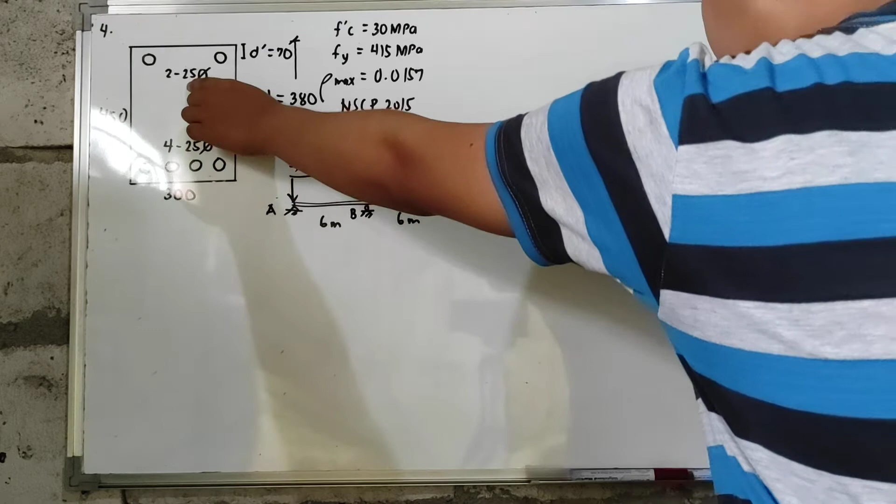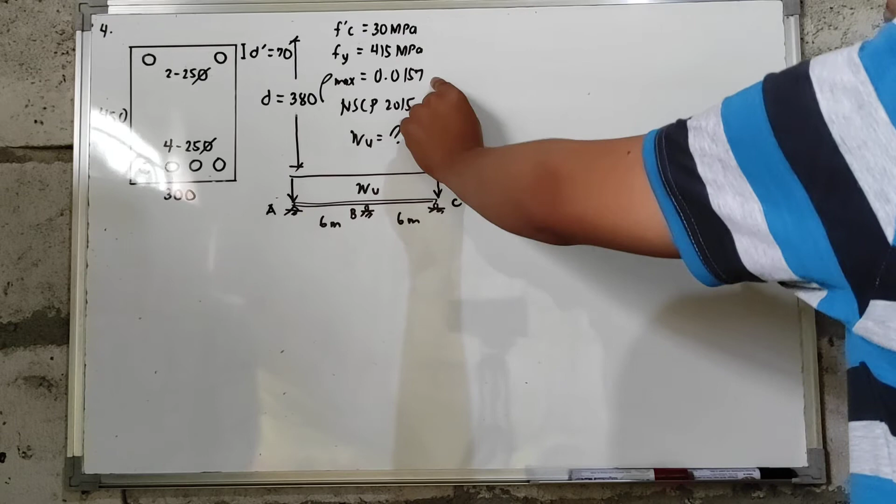The beam is reinforced with 25 mm diameter bars, 4 bars at the tension side, and 2 bars at the compression side. Concrete strength is equal to 30 megapascal. The steel yield strength is equal to 415 megapascal. And we have a given of rho max which is equal to 0.0157.

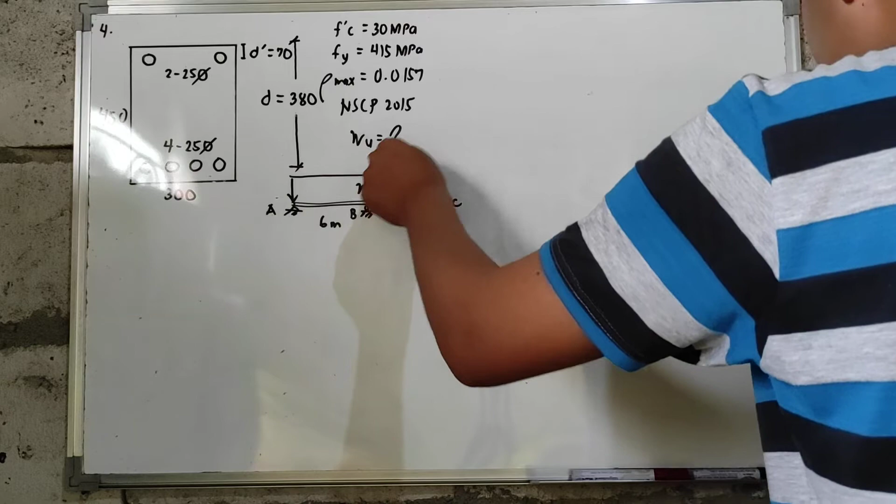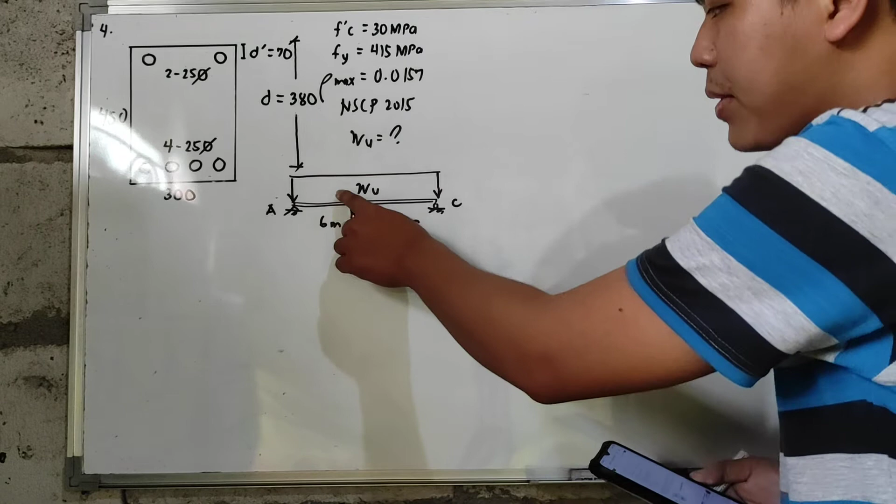We are tasked to determine the value of the factored uniform load that the beam could carry using NSCP 2015 provision. So meaning to say factored load, that's why we have subscript U. Meaning to say, the value of W we're looking for is already ultimate.

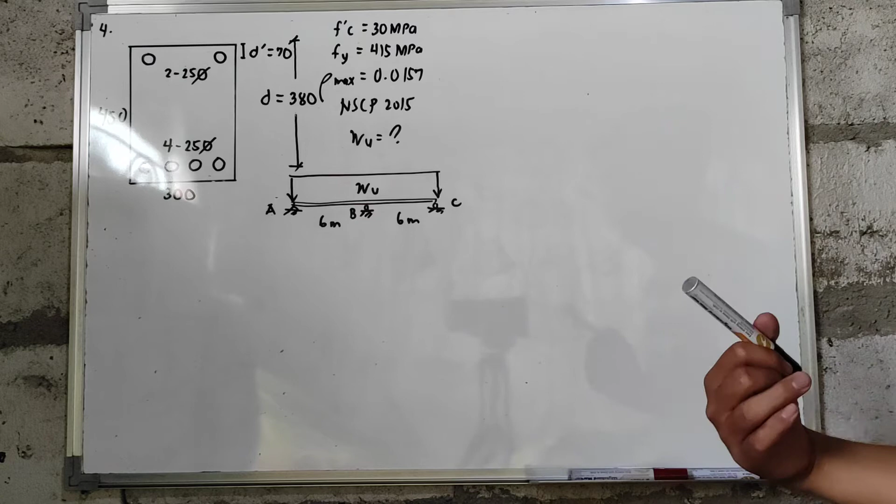So to find the value of our W, we need to know our maximum moment. So our maximum moment here, we equate it to the ultimate design moment capacity of our beam. So how will we know the value of our MU? By means of finding the design strength using our formulas for DRB.

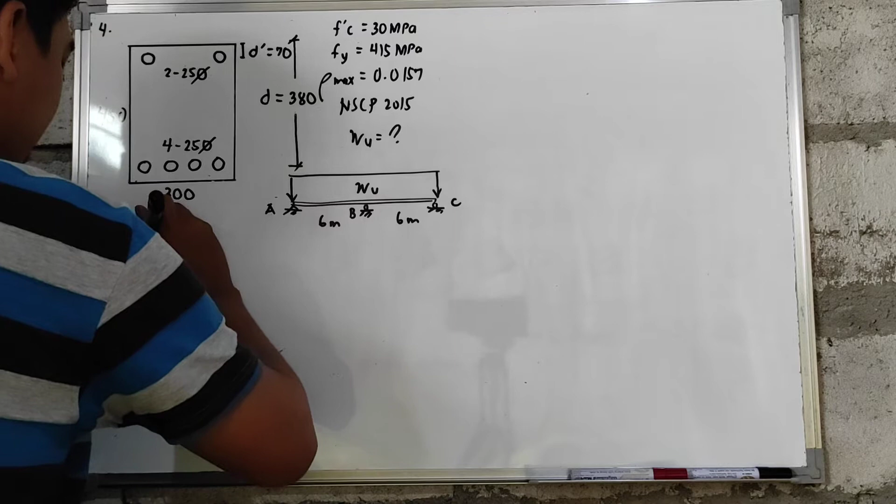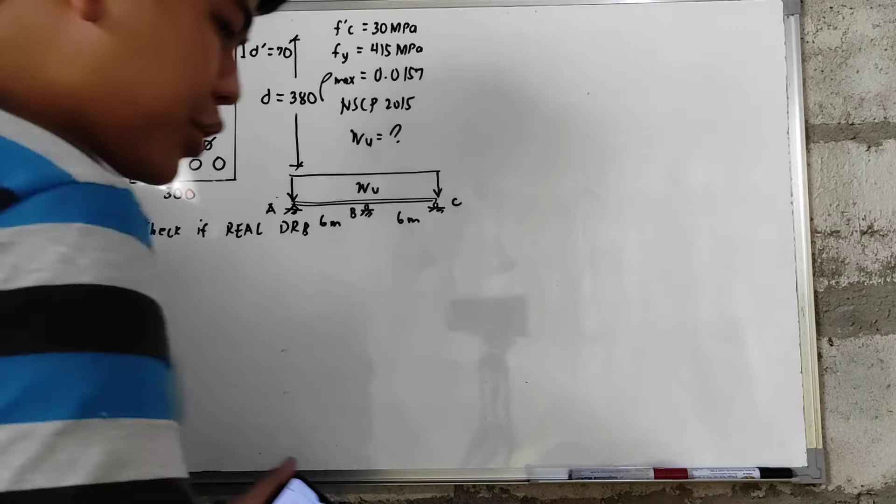Before we proceed to getting that maximum moment, let us first check if this is really a DRB (doubly reinforced beam). Sir, how do we check if this is DRB or not? So let us first find our actual rho and we're going to compare that to the value of rho max.

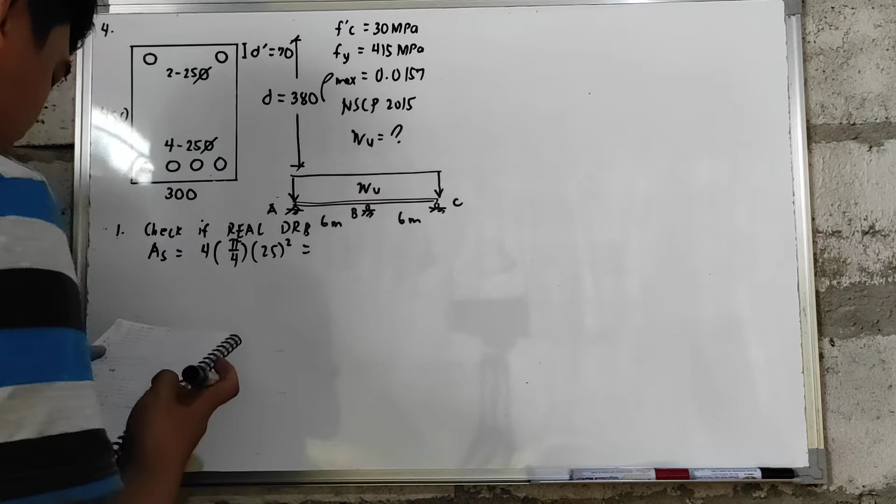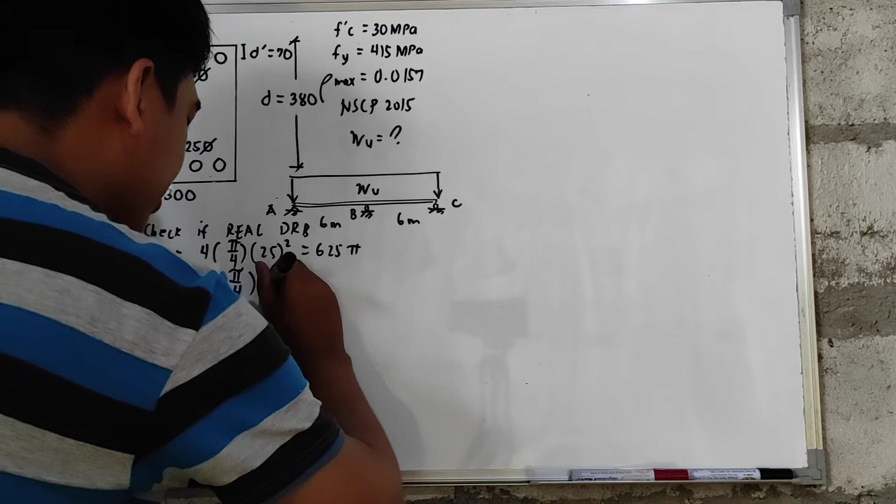So let's get our As first. We have 4 pieces of 25 mm diameter bars, so we have 625 pi. For the area of steel on the compression side, we have 2 pieces of steel bars with a diameter of 25 mm, so we have a value of 312.5 pi.

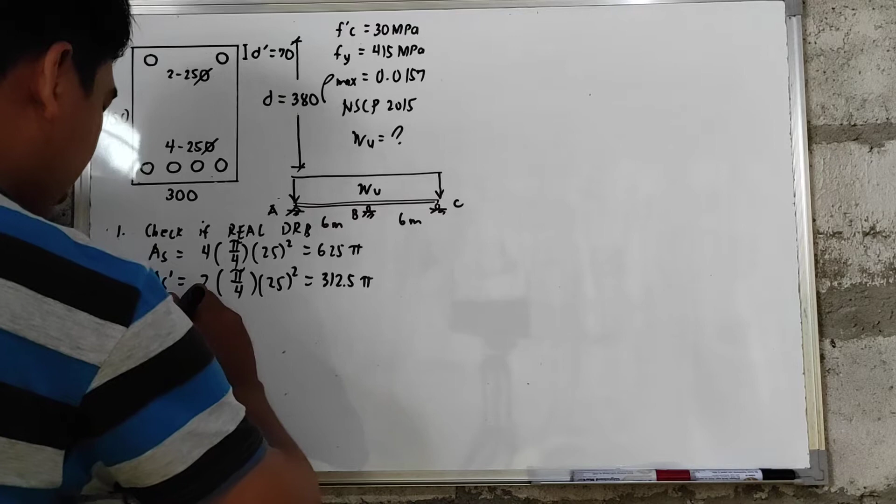So in checking for DRB, let's first get the actual rho. That is As over bd. So our As, that is 625 pi over our b, that is 300. We have an effective depth of 380. So we have a value of rho equal to 0.01722. So comparing it to the given rho max, this is greater than the value of rho max.

Therefore, we have a doubly reinforced beam. So for the next procedure, we will...

assume that using C equals T, we're going to assume that compression steel will yield. So when compression steel bars yield, the value of Fs prime is equal to the value of Fy. So C equals T, so we get C sub 1 plus C sub 2 equals T.

So our formulas here, our C sub 1, that is from our singly reinforced beam, is 0.85 F prime C times A times B, plus our C2 due to the compression bars, that is As prime times Fs prime. But since we assumed our steel yielded, that is Fy equals As. So for DRB, automatically we assume the tension steel yields, and later we'll check if the tension steel and compression steel really yield.

So if we substitute our givens, we have F prime C of 30 megapascal. Our A, that's what we're solving for. Our B, that is 300. The value of As prime, that is 312.5 pi multiplied by Fy of 415, equals 625 pi, that is the value of our As multiplied by Fy of 415. So the value of A is now equal to 53.258 mm.

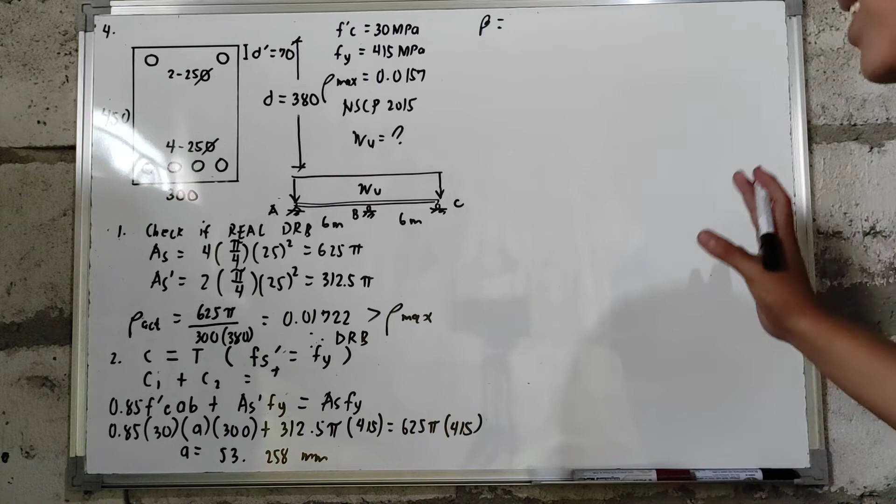So to compute the value of our C, we need the value of beta. Since we're using NSCP 2015, our limiting value for that is 28 megapascal. Since our actual compressive strength is greater than the limiting value, we're going to use this formula: 30, our actual, minus 28, our limiting value, over 7.

So the value of beta is now equal to 0.836. So now we can get the value of our C. All we need to do is divide the value of A by beta. So we will have a value of 63.706.

So for the next step, meron na tayong value ng A at saka C. So we will check if our assumption is correct. Sir, paano po natin i-check yung assumption na yan? We will calculate the value of your Fs and the value of your Fs prime.

So for the Fs, that is 600 D, we have an effective depth of 380 minus yung C natin na 63.706, over yung C natin na 63.706. So we have a value which is equal to 2,978.94 megapascal, which is greater than the value of your Fy na 415 megapascal.

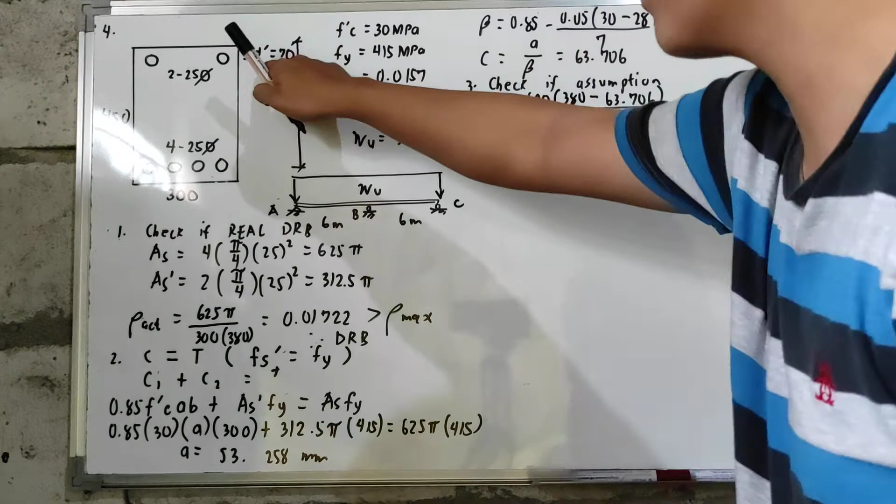Therefore, tension steel still yields. Next, for the Fs prime, we have 600 times C, 63.706 minus yung D prime natin. From the center of your compressive steel bars reinforcement to the outermost fiber of the beam in compression, we have 70 over 63.706. So you have a value of, eto negative yan, di ba? Negative 59.279 megapascal. So negative pa yung value natin.

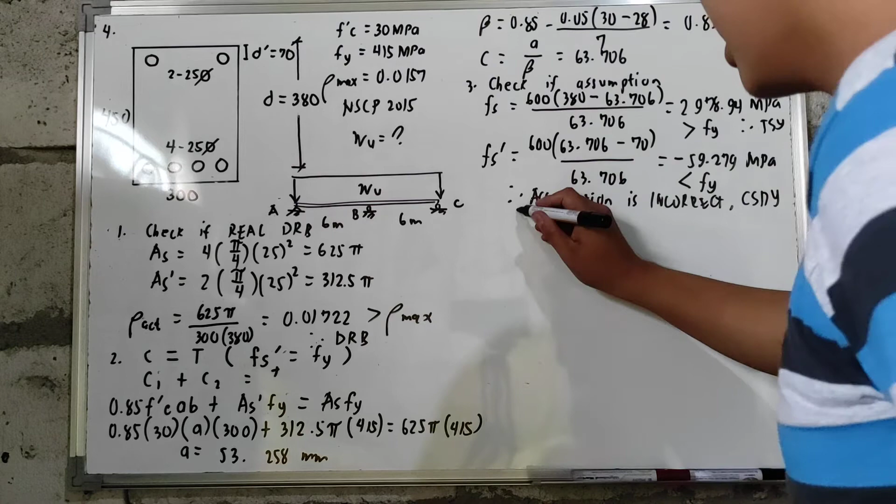Definitely, that is less than the value of your Fy, meaning your assumption is incorrect. Meaning to say, your compression steel bars doesn't yield. So kung mali yung assumption mo, recompute tayo. If you are going to recompute, go back to step number 2.

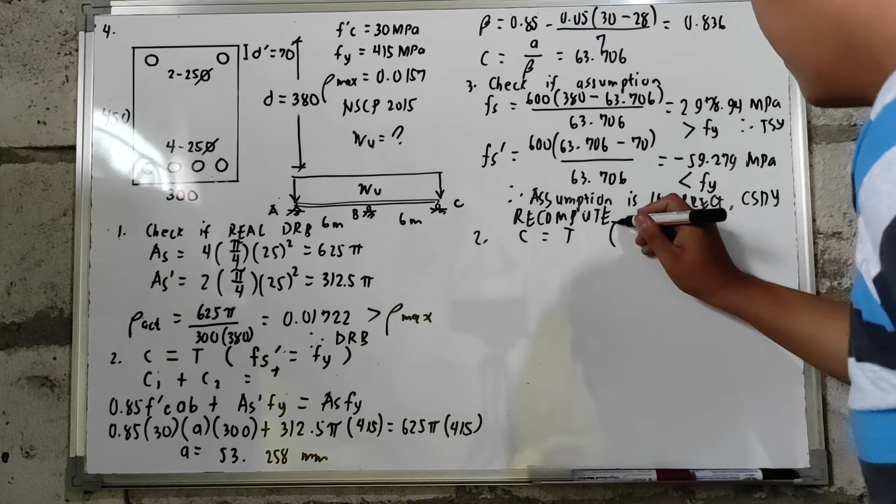So by this time, magiging C is equal to T na tayo. Pero yung value ng Fs prime natin, that is equal to 600 times C minus D prime, over C. Okay? So with that, yung C1 natin, same lang naman yung approach natin dito. Kaso nga lang, yung A natin dito, mangyayari niyan is A is equal to beta times C.

So if we substitute yung mga values natin, you have 0.85, yung F prime C natin, that is 30. Yung A natin, yung beta natin, we have 0.836C multiplied by the value of your B na 300. Plus yung AS prime natin na 312.5 pi multiplied by yung Fs prime natin.

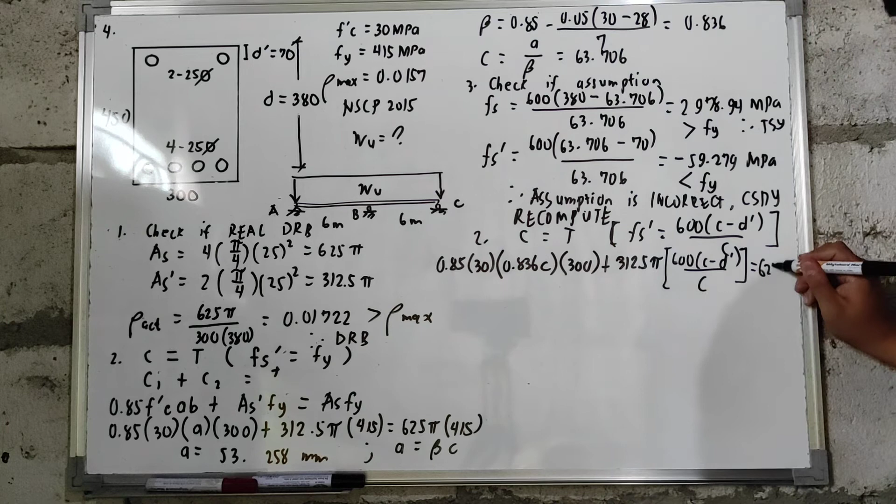So ito yung gagamitin natin na value ng Fs prime. So you have 600C minus D prime over C is equal to AS. Yung AS na na-compute natin, that is 625 pi multiplied by 415, which is the yielding strength ng steel natin. So by shift solve, we can now calculate for the value of your C, which is equal to

99.87 mm. And next, we're going to compute for the height of your compression block, that is beta multiplied by C. So you will have a value of 83.49 mm. And lastly, we're going to check if our assumption is correct.

Paano po natin i-check yan? So kunin natin yung Fs, kunin natin yung Fs prime. So Fs, you have 600D minus yung na-compute natin na C na 99.87, over the value of your C na 99.87. So you have a value of your Fs which is equal to

1,682.97 megapascal. Then for your Fs prime, you have 600 times C natin, 99.87 minus yung D prime natin na 70, over 99.87. So you have a value of your Fs prime which is equal to 179.45 megapascal.

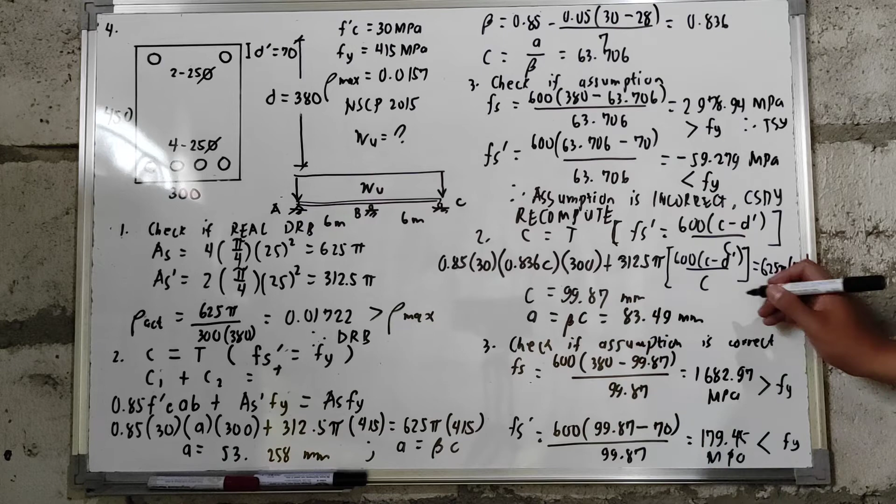So titingnan natin dito, this is greater than Fy, therefore tension steel still yields, and this is less than Fy, therefore compression steel bars will not yield. Therefore, yung assumption natin, nung nag-recompute tayo na hindi mag-yield yung compression steel bars, is correct. So meaning to say, eto yung mga values ng C at saka A na gagamitin natin in computing for the value of your ultimate moment capacity.

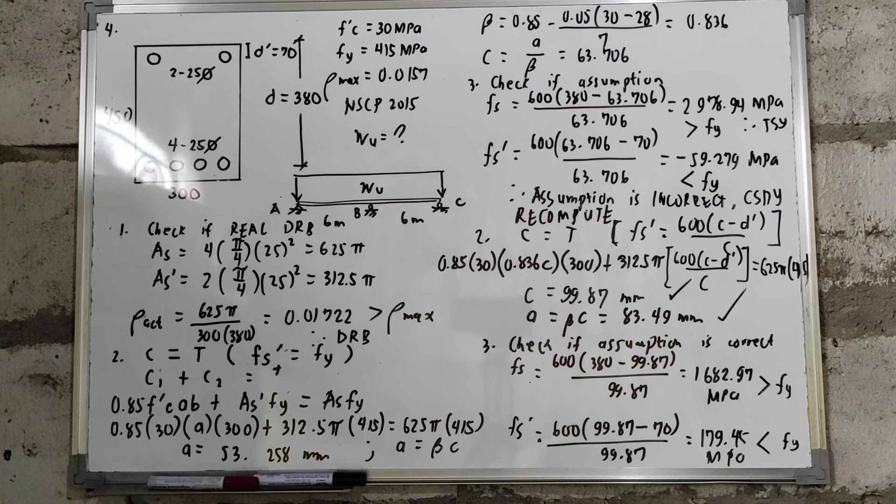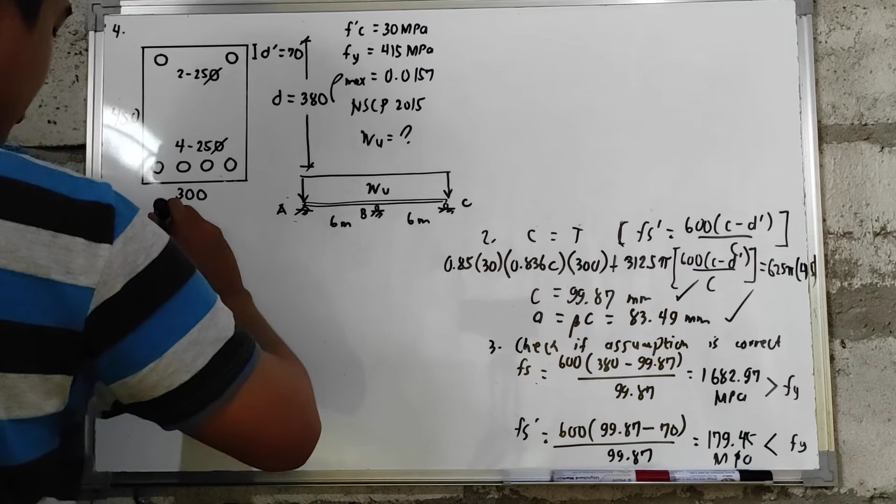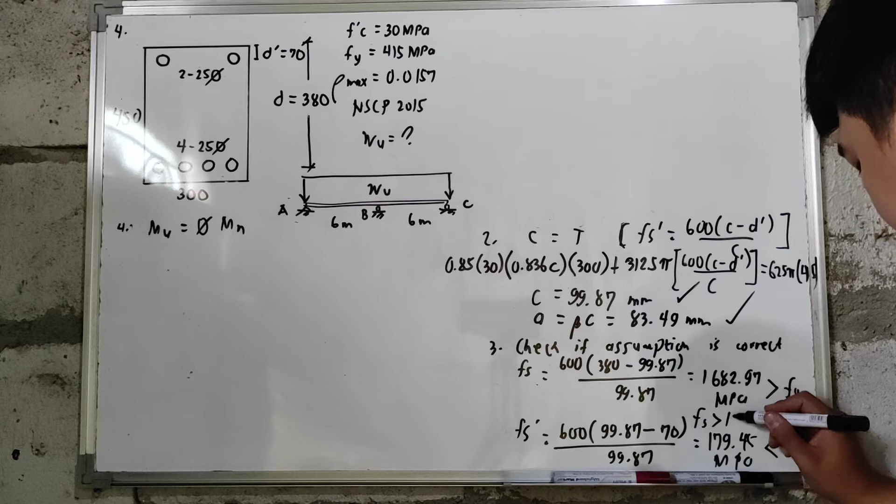So let us now solve for the value of your ultimate moment capacity. So Mu is equal to reduction factor multiplied by nominal moment. So para mahanap natin yung reduction factor natin, tingnan lang natin etong value ng fs natin. So yung other way natin sa pagkuha ng reduction factor, so kung titingin tayo dun sa actual stress na nararamdaman ng steel natin. So since yung fs natin dito is greater than the value natin sa 1,000, therefore reduction factor is 0.9.

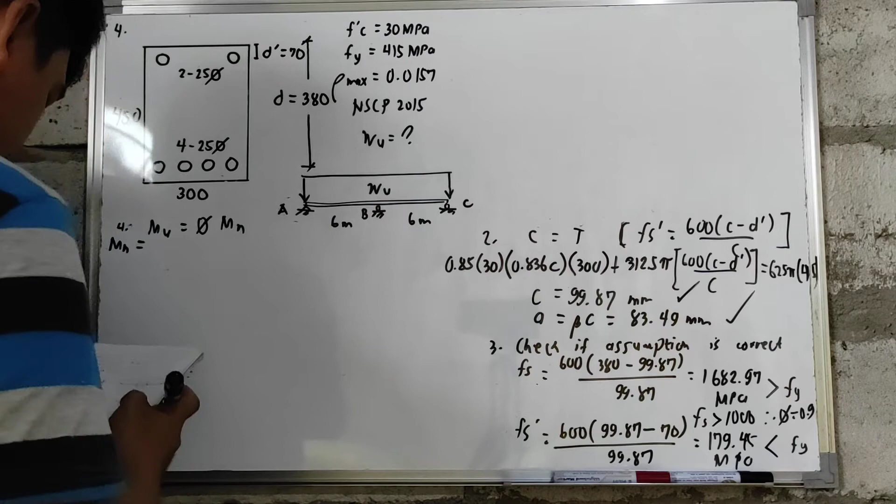So yung 0.9 yung reduction factor natin, kunin na lang natin yung value ng nominal moment natin. So that will become C1 multiplied by yung moment arm natin na D minus A over 2, plus C2 multiplied by the moment arm of D minus D prime. So nominal moment is equal to 0.85.

Yung F prime C natin, that is 30. Yung A natin na na-compute is 83.49, multiplied by yung B natin na 300, multiplied by yung D natin na 380 minus 83.49 over 2, plus etong C2 natin na AS prime.

So the value of your AS prime is 312.5 pi multiplied by the FS prime we got, 179.45, multiplied by the moment arm of D minus D prime.

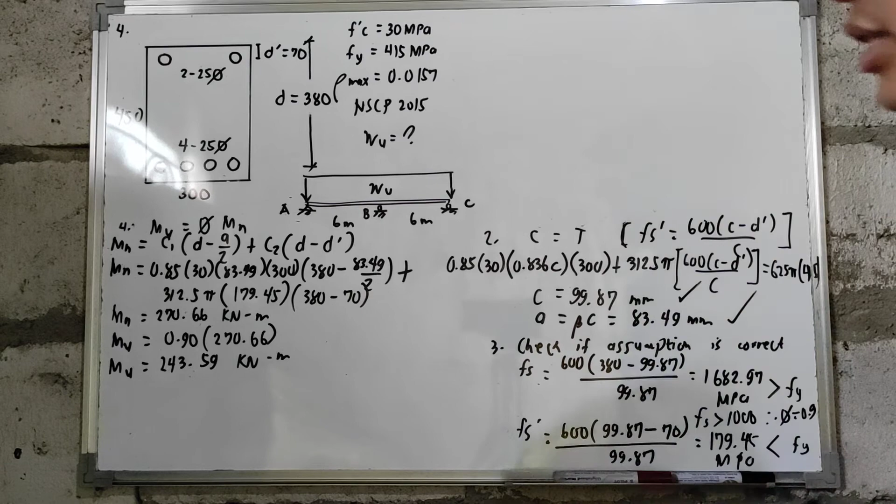Now, the principle here is we will equate our MU capacity. That must be greater than or equal to the MU maximum. So this is from our loads.

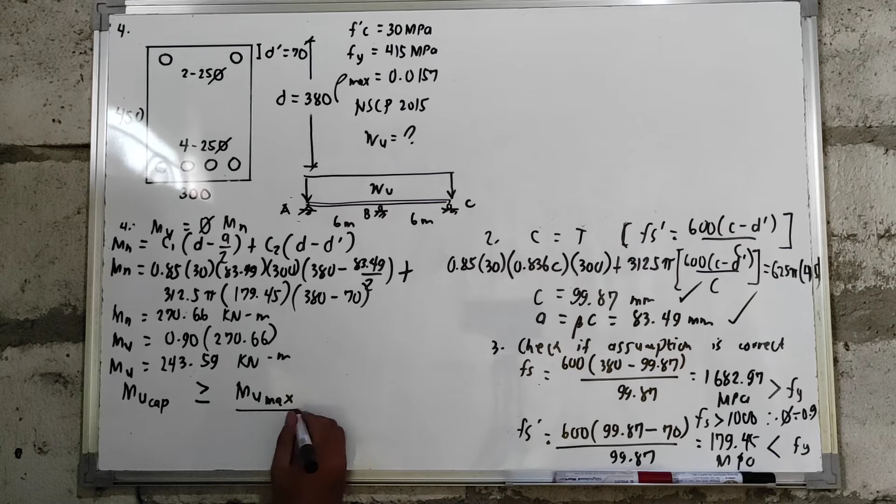Then, this is using our design strength, the strength of our beam. So we equate the capacity of the beam versus the loads that the beam will carry. So with that, we have no problem with our MU, no problem with our MU max. So what we'll do now is refer to our loadings.

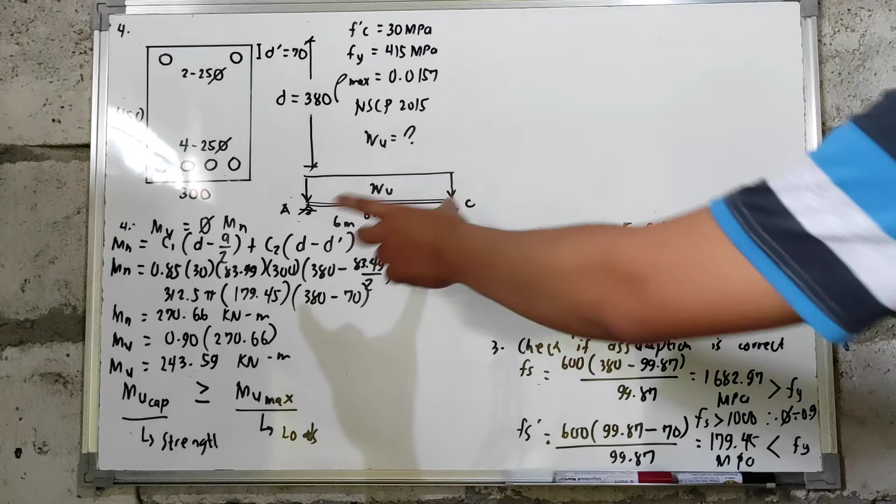So we notice we have an indeterminate beam. So we have three supports: Support A, B, and C.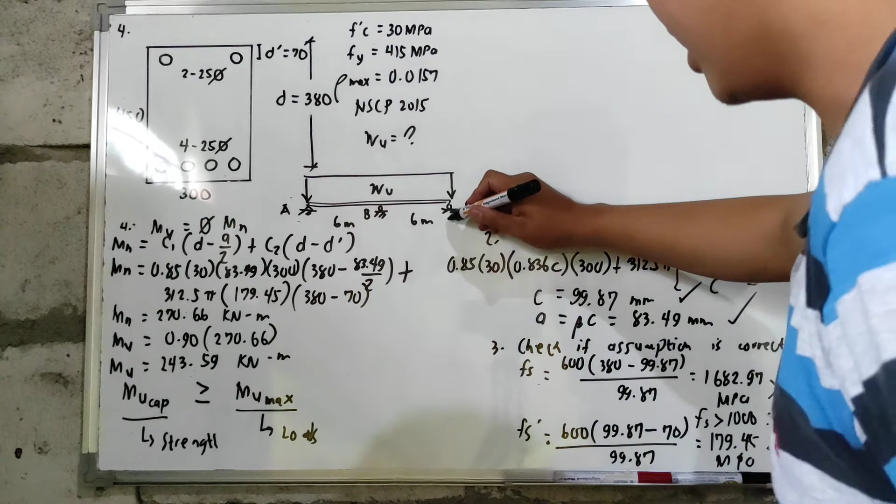So we're going to use the three-moment equation here since we have an indeterminate beam.

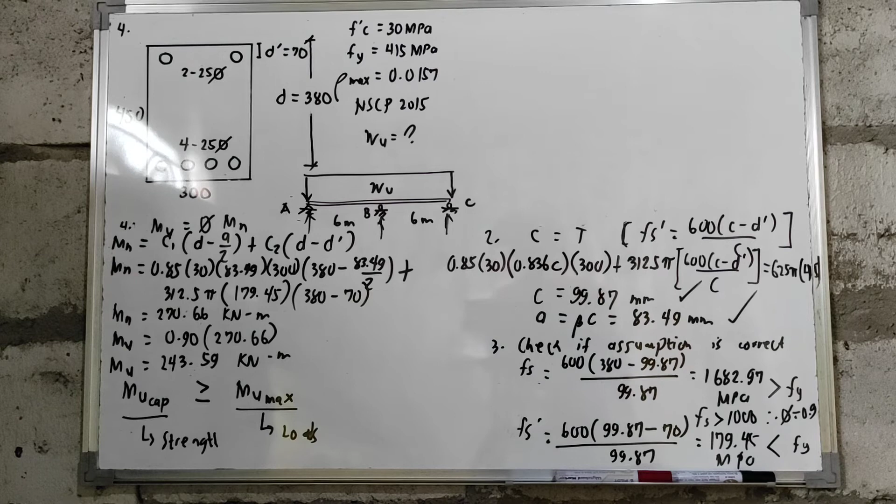Using the three-moment equation, what we'll do is we have three points, A, B, and C. That's why it's called the three-moment equation, point A, B, and C. So we notice at span A, B, C.

So our MA and our MC, they are exterior supports, so the value of our moment there is 0. So we will only have a value for MB.

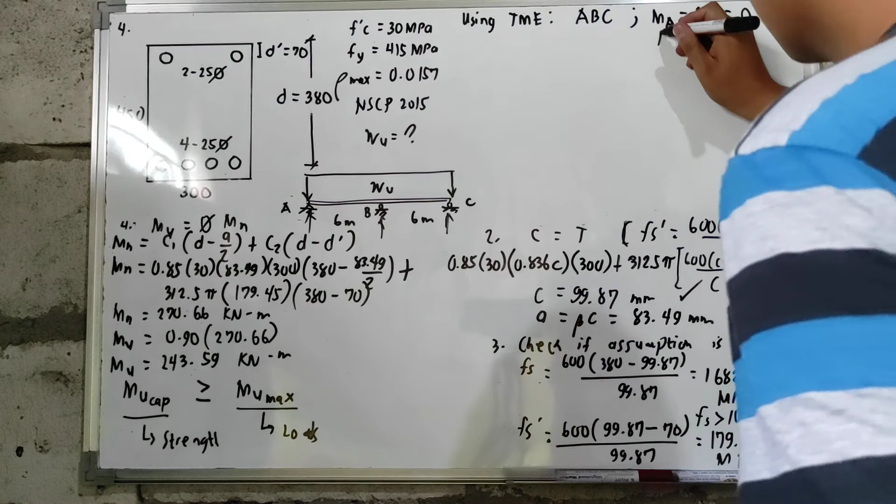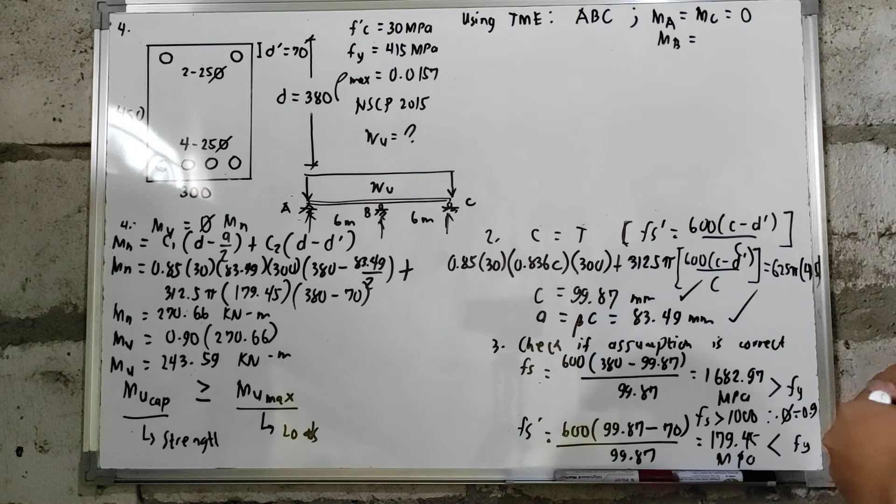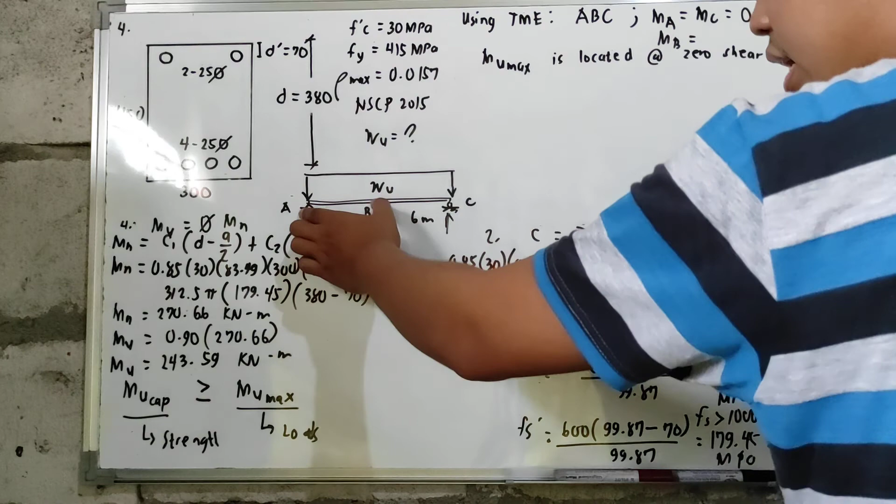And of course, in getting our maximum moment, always remember that the maximum moment, MU max, is located at zero shear. So the maximum moment is located at zero shear. So in our estimation, it could be at these points, or it could be in the middle since that's where we'd have zero shear.

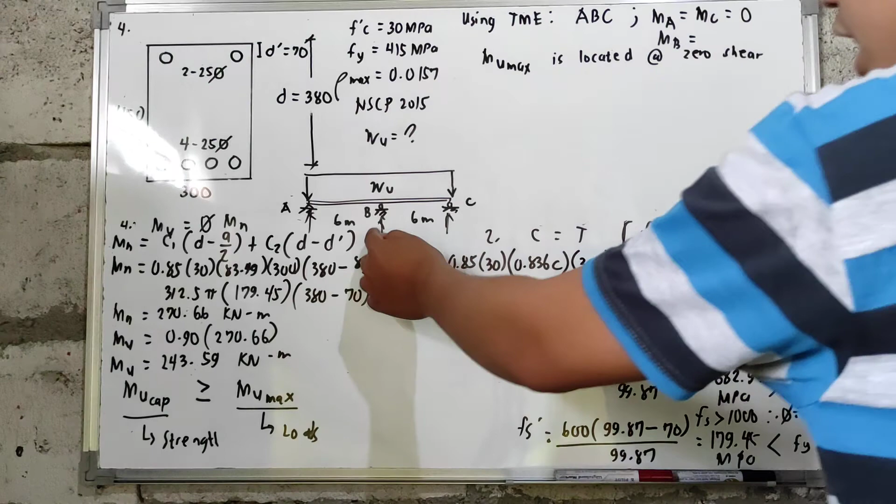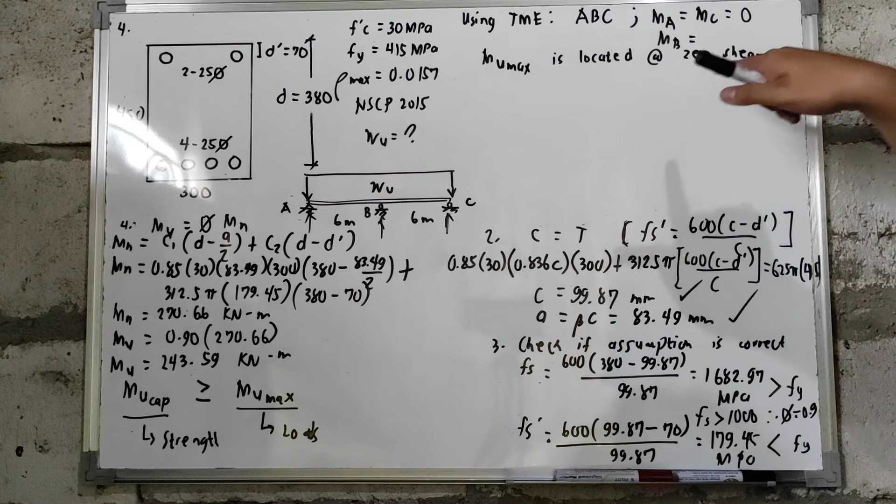But based on this figure, when it's a simply supported beam over our three supports, usually the maximum moment is located here in the middle, at MB. So meaning, our MU max is located at zero shear, and it happens that when the diagram or loading looks like this, the maximum moment is in the middle.

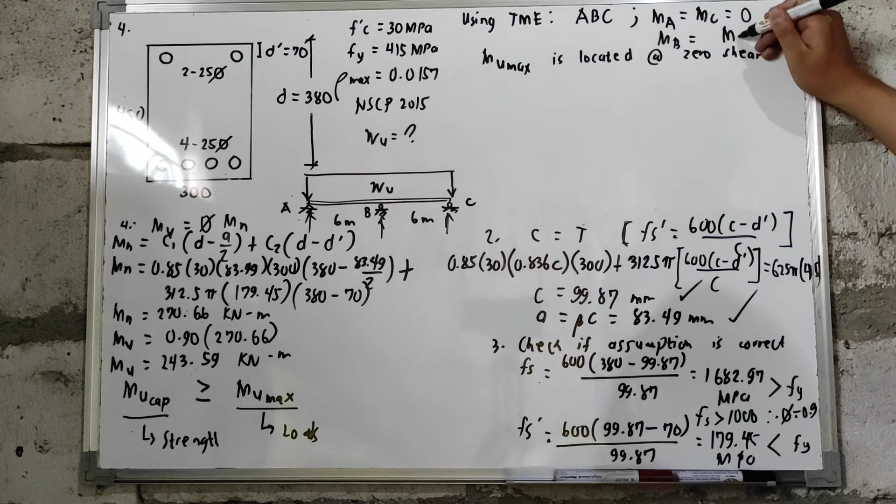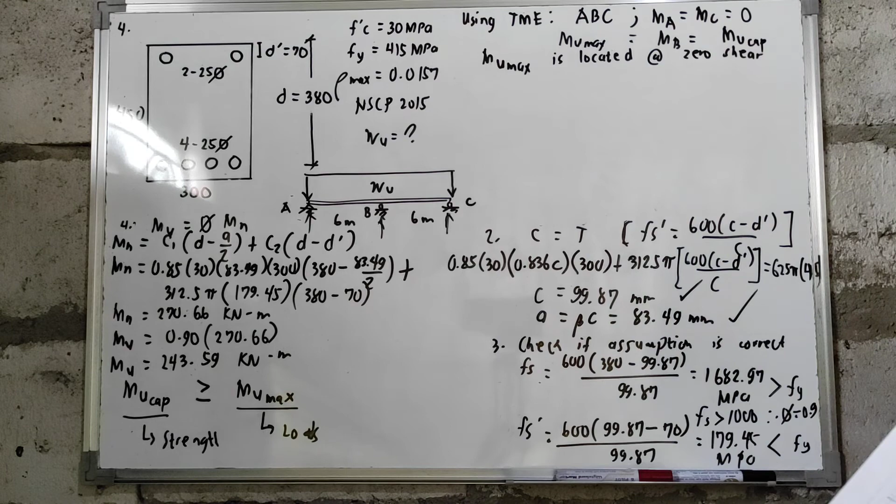So MB is now equal to our MU capacity, because our MB is the value of your MU maximum. So with that, we can now say we have the value of our MB.

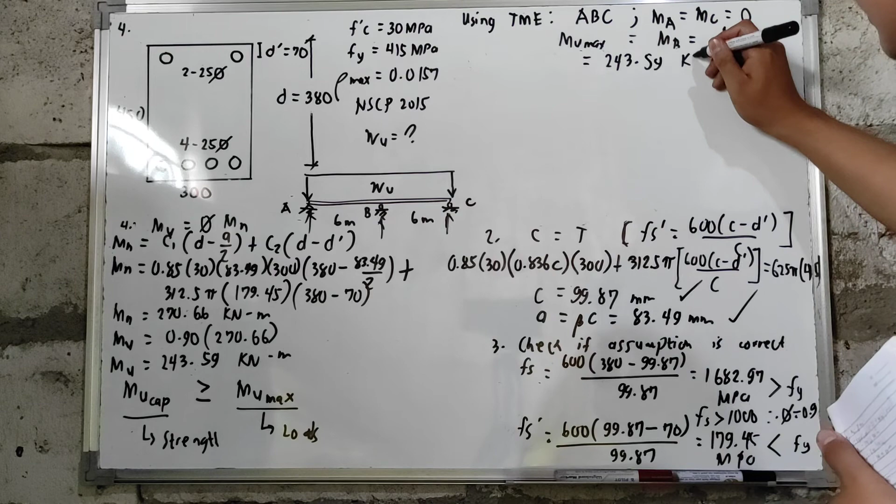So sir, what is now the value of our MB? So this will now be equal to what we got, 243.59 kilonewton meter.

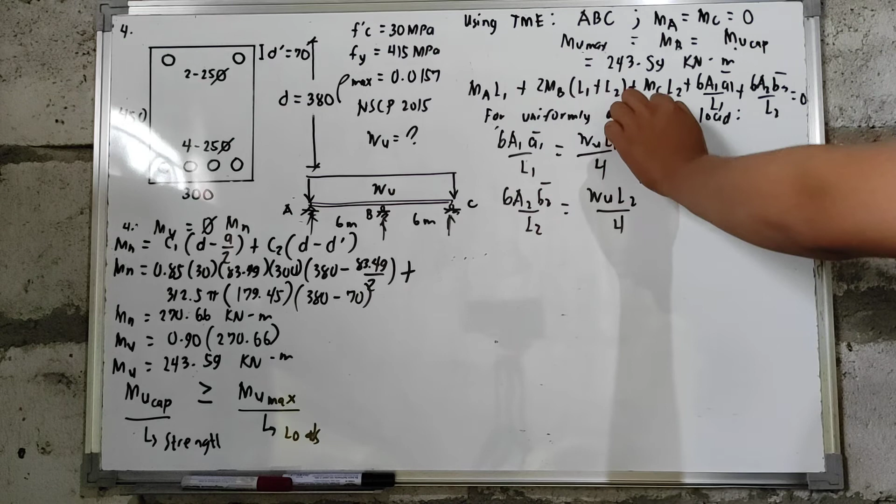So now, let us calculate using this formula for the three-moment equation: MA L1 plus 2MB (L1 plus L2) plus MC L2 plus our factors here is equal to 0.

Since our MA is 0, that becomes 0. And our MC is also 0, so that's 0 too. So for this one, what remains is 2MB. So for this, 2MB. What happens here is for our MB we already have a value which is equal to 243.59.

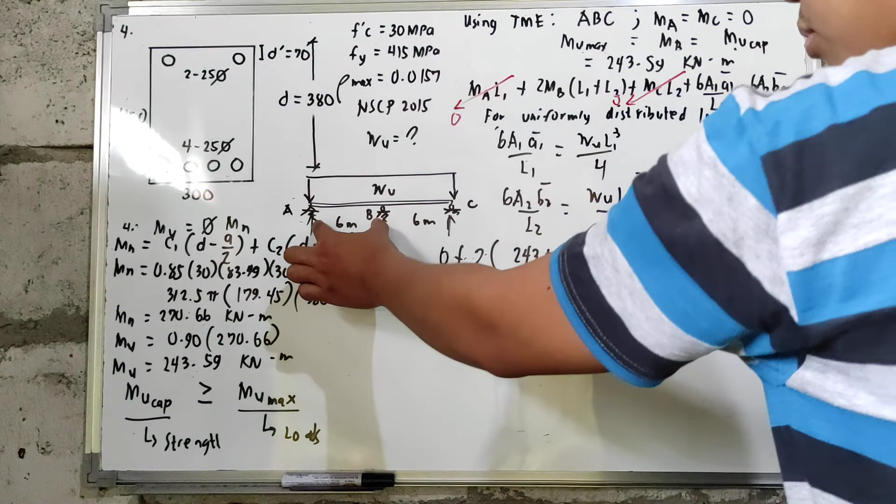Plus our L1, 6, our L1. Then our L2, 6. Plus 0, 0 plus, plus this WU, L1 cubed, our L1 which is 6 cubed over 4, plus WU, 6 cubed over 4, is equal to 0.

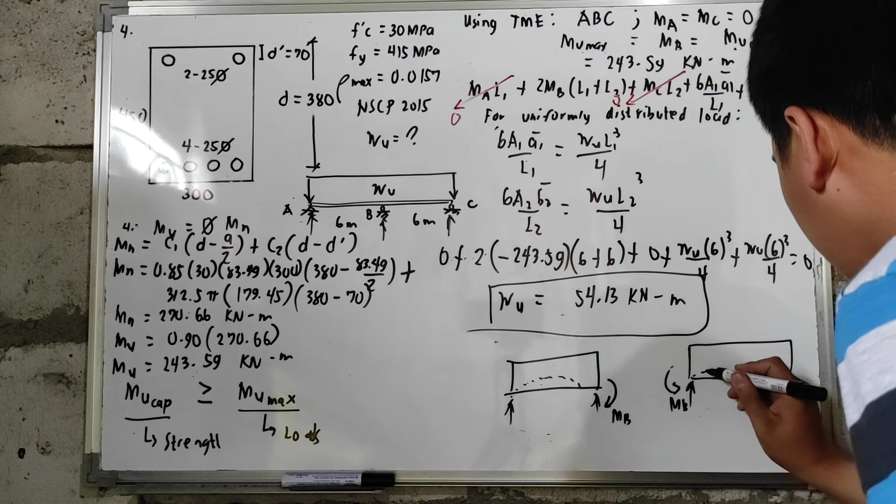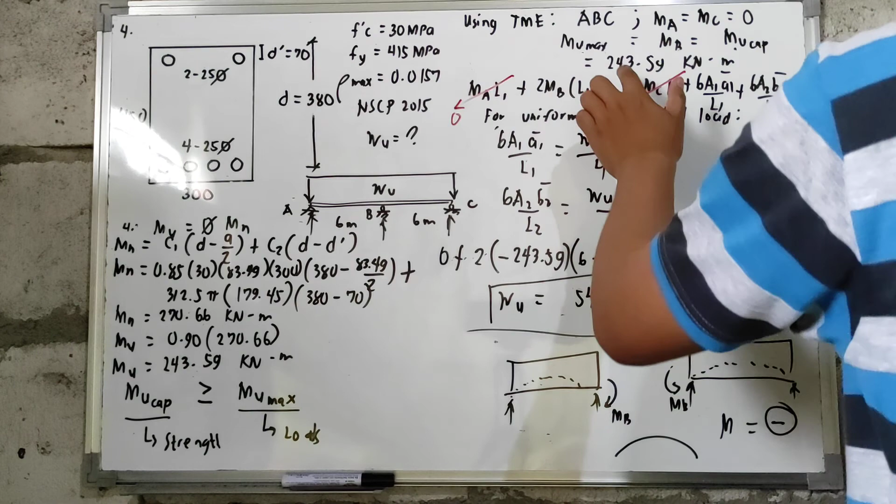Concave, this one makes it concave downward too. So by means of the three-moment equation, when your moment makes the beam concave downward, or gives it a sad face, what happens is the value of that moment is negative.